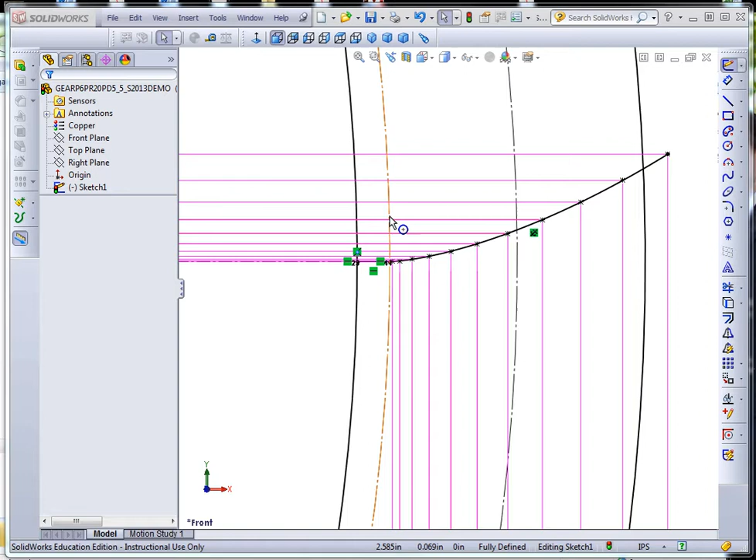So in this video we're going to continue on with the equation-driven curve. We put the curve in. We fixed it. We had to actually take off a constraint between the curve and that point at the end of the radial line there, or the base circle. And with these equation-driven curves, if you just left-click on them, you get the equations back and the range back and so on. So it says it's fully defined.

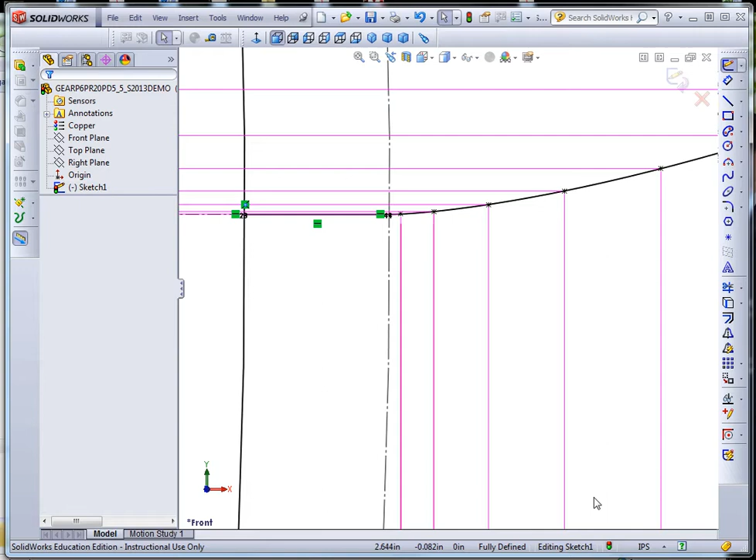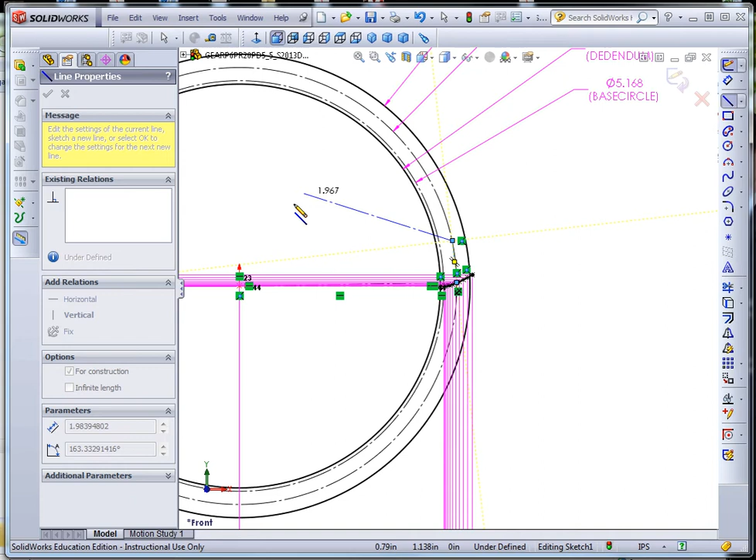What would happen now if we went to put in a tangency constraint between this radial line and that curve, it would actually come back and say it's overdefined. So anyways, we do have that curve now, so we can just go ahead and add in the construction line as we did before from the center, and we'll just move along this edge here until we get that intersection symbol and come out here coincident to the pitch circle back here, and then we want to again create this perpendicular bisector right there,

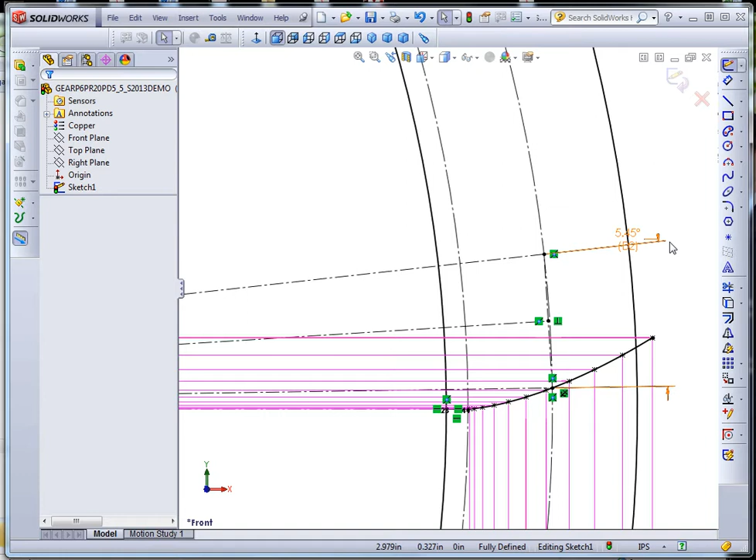and the angle as before is simply going to be 360 divided by 66, which is the number of spaces plus the number of teeth. And this time it actually is showing that as fully defined. And so we'll go ahead and do the mirror. For the mirror, we want to grab the radial line and the spline and mirror about this perpendicular bisector.

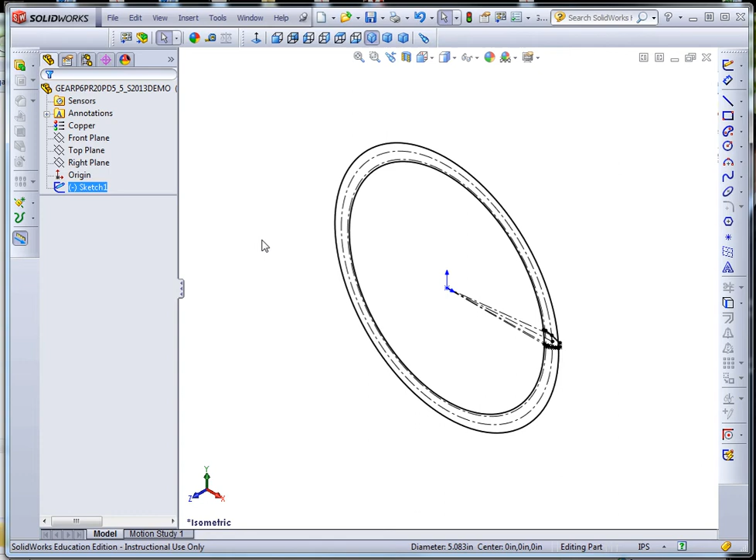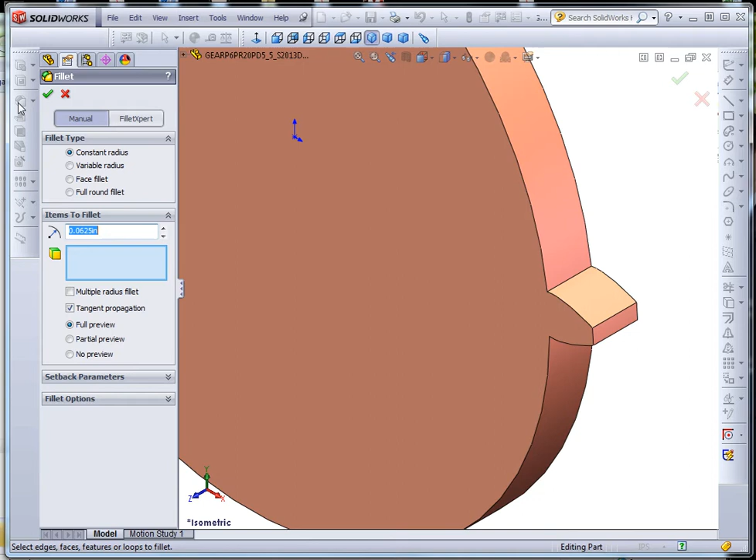And so now we can go ahead, we'll get out of the sketch, and I'll pick this inside curve, and we'll extrude that 3/8 of an inch. Pick the sketch, hit the extrude again, and under selected contours we'll select that. This will be through all. Okay, and put the fillet in as before. It's a 1/16 inch fillet. Okay.

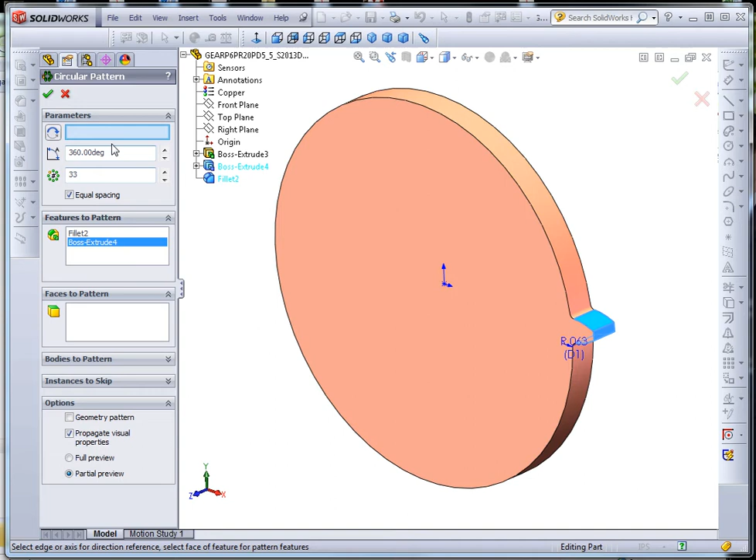We could go ahead and put the hole in. I'm just going to go ahead and do the circular pattern, picking the last two things there. Okay, so you have the teeth, so that works well. As seen, the curve that we created passes through all the points that we had created the other way that we made the gear.

So just one other point I'll make is notice that first we used the sketch with just the dedendum circle to create the boss, the initial extrusion, and then we used the same sketch to create the tooth, then added the fillet, and then did the circular pattern. Notice the hand underneath the sketch. That hand means that the sketch is shared. In other words, it's being used by more than one feature. And that's just as a reminder.

Suppose for some reason you have a whole bunch of features, and you go to delete the feature, and then you see the sketch and you delete the sketch as well. Well, the hand just reminds you that it's actually being used by other things as well. So anyways, I think this wraps up this series of videos on creating this 5.5 pitch diameter gear.